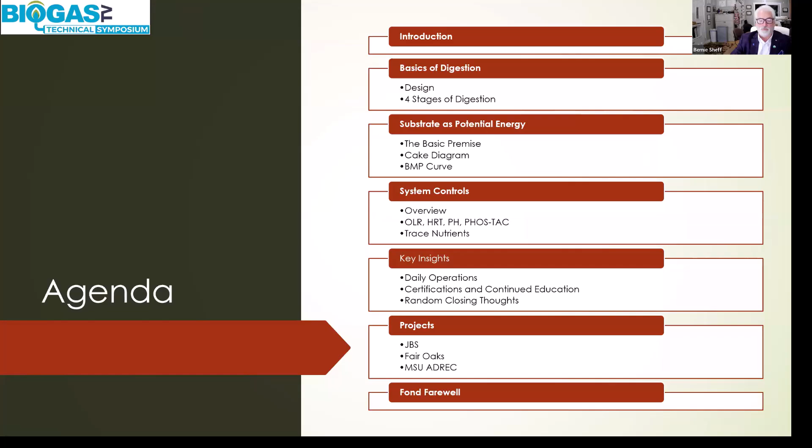Then we're going to talk a little bit about system controls, and then some insights. And then Paulie wanted me to talk about a couple of good projects. We didn't work on these together, but some of the stuff I've done in the past is a bit of an overview. So we'll get to that towards the end.

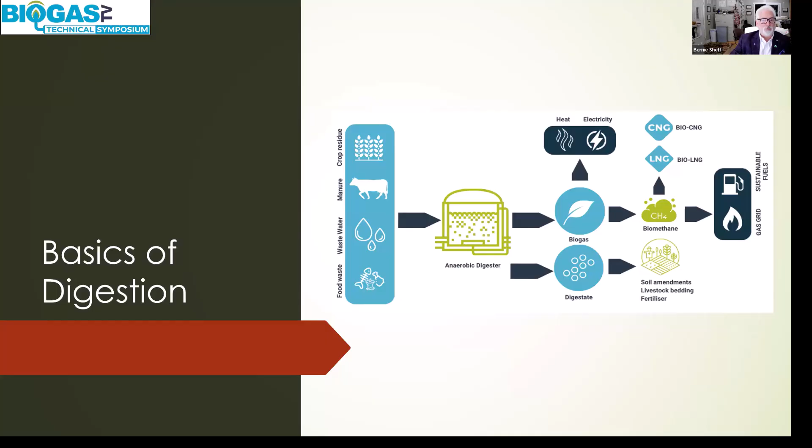So a couple neat little slides. This is a slide from the ABC. Again, these are more to have in your back pocket. I really like these two. It's a nice breakdown, and the digester doesn't have to be a CSTR. It can be a covered lagoon. It could be a plug flow. It can be a mixed plug flow. But in general, a nice slide there for you to have.

This is a second one. I think this is just a neat little slide that you can have in your back pocket that talks about anaerobic digestion in a complete overview, which is something you might need when that tour comes by your facility and you'd like to put something up on the wall to give them a little primer.

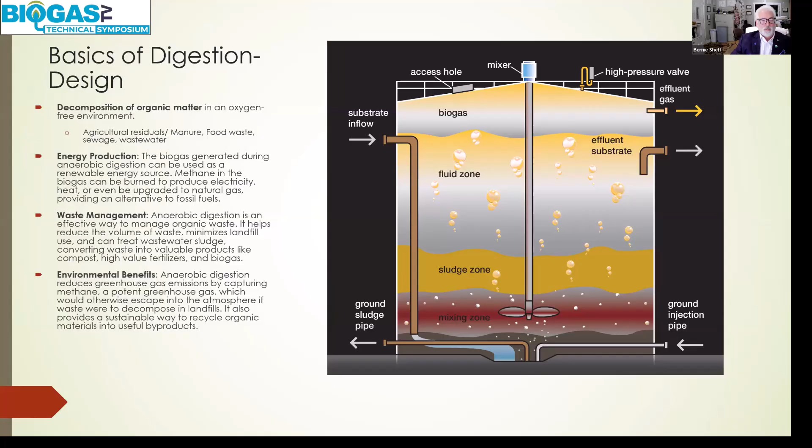So when we're talking about anaerobic digestion, and most of you might know this by now, it is indeed a 4-stage process. This slide we put together has some nice words, and it'll marry up nicely with the next slide. First, hydrolysis: it's where your complex organic molecules, your fats, your proteins, your carbs, are broken down into smaller molecules. These are your sugars, your amino acids, your fatty acids, things like that.

Then acidogenesis happens, which is a bacterial process where the products that came from hydrolysis are converted into acids. The next step is where we take those acids, and again, this is all bacteria doing the work, and these acids are further broken down to produce acetic acid, hydrogen, and carbon dioxide.

And then our fourth step. What kind of a crazy person would put the energy at the very last step? Essentially, you've got steps up front that are uncontrollable, and you've got one step at the end, methanogenesis, which I always like to call the old man of the bunch. That's grandpa. He's in the home, and he has to get the exact amount of food every day, and he's not a bacteria. He's actually a different organism, the oldest organism. Archaea means the ancient one.

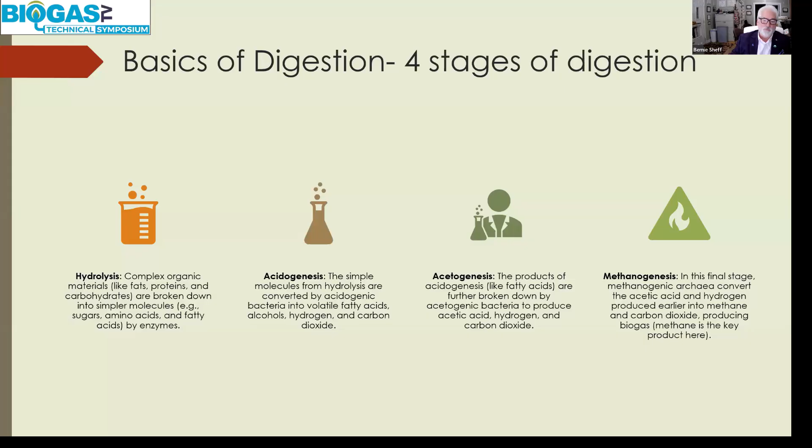So when we look at this in a different way, this is a slide from the American Biogas Council that I've been using for years. Take the words from the previous slide, and that should help you explain what's going on here. Check out that very end step, going from 3 to 4A and 4B. You see something interesting going on? Right, up to 25%, and maybe more. It depends if you can feed more hydrogen into the system.

Think about that. You feed more hydrogen into the system, and there's this other pathway that's there doing its job. So you have acetic acid, or hydrogen and CO2, both being converted by a couple of different forms of archaea. Methanosarcina is the one using the hydrogen. I did some tours; if you ever get a chance, go to Denmark and see what they're doing. I went to one facility.

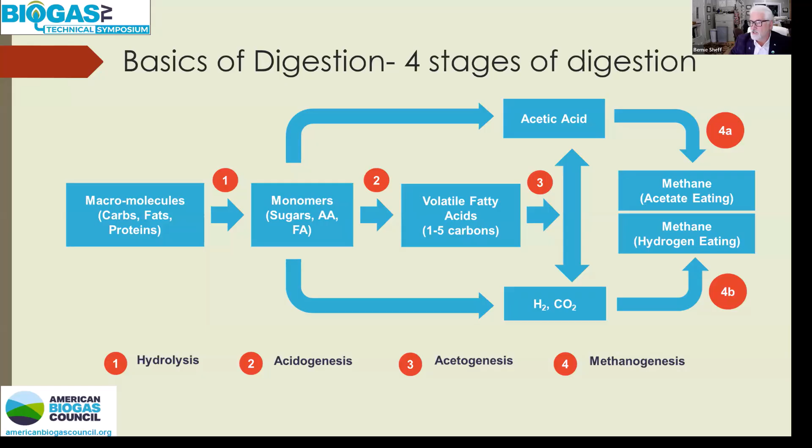When they had excess electricity on the grid, they would use the windmills to turn hydrogen generators and feed the hydrogen into the digester. Somebody's figured out something, hey? Somebody's a step ahead of us. That means we just got more to learn.

Okay, I want to talk about substrate now as potential energy. We understand, just amazingly by what you've already gotten through, you know how anaerobic digestion works. I want to really get into this because as an operator, turning a wrench or pulling out a pump or keeping the upgrader running, that's important. That's mechanical. But understanding what's going on in that tank is going to make the difference between you running a successful facility or you having problems, right?

So I want you to start out, and this is the basic premise. You must understand that everything can be considered volatile solid or volatile if it will burn. If it burns, if it makes heat, it is, by definition, volatile. Unfortunately, the types of VS are completely different when considering their viability and their ability for the digester to make methane from them.

This paper, go get it. Right after I'm done, I want you to get online and get this paper and read it. Doesn't matter if you run a food waste digester, whatever you're doing, read this paper. One of the best ever written. She's tremendous. Dr. Ann Wilkie, just fantastic. You read that paper, you go back to what we're saying right here, you must understand this.

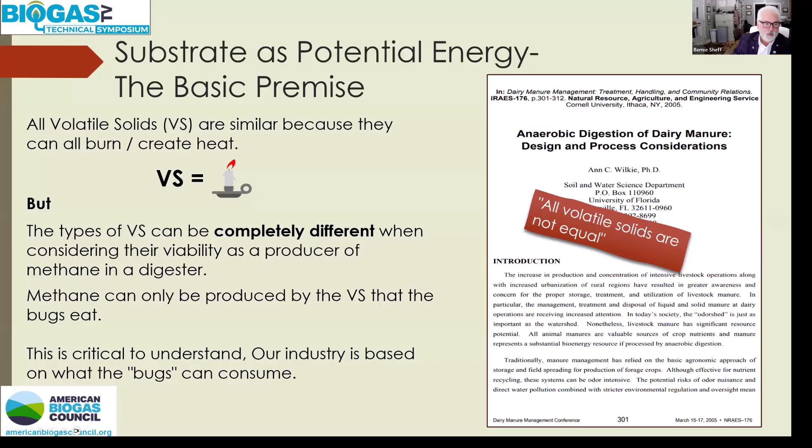Our entire industry is run by a bunch of bugs. That's it. The bugs run it, right? That's where our energy comes from, is bugs, bacteria and organisms that work together in a 4-step process in order to make methane.

So from that standpoint, going forward in your operations or anytime you're designing a digester, if you're an engineer or operator or process control, I want you to look at any substrate you're going to be dealing with as a 2-layer cake. You got a layer of cake, you got a layer of fruit, and then the second layer, but it's not cake on the bottom. The bottom is going to be wax-coated cardboard. Bugs can't eat it, but it certainly burns. It floats, doesn't separate, it comes out of the system. Look at the BMP, 0, right?

Conversely, look at the sugar. What happens when you put that piece of cake in the reception pit going into the digester? Cardboard comes out. The sugar immediately jumps all the way to the second step. It completely dissolves and starts making gas quickly. The cake might spend some time before it finally breaks down, but your fruit might be there for a day until it's completely broken down and gets into the system.

When you get a BMP for something, you always need to be breaking it down in your head. It's a high sugar substrate or it's manure. Well, if it's manure, I know that 45 to 50% of it is going to be fiber, maybe more, that doesn't make any energy. So that's why understanding this is so important.

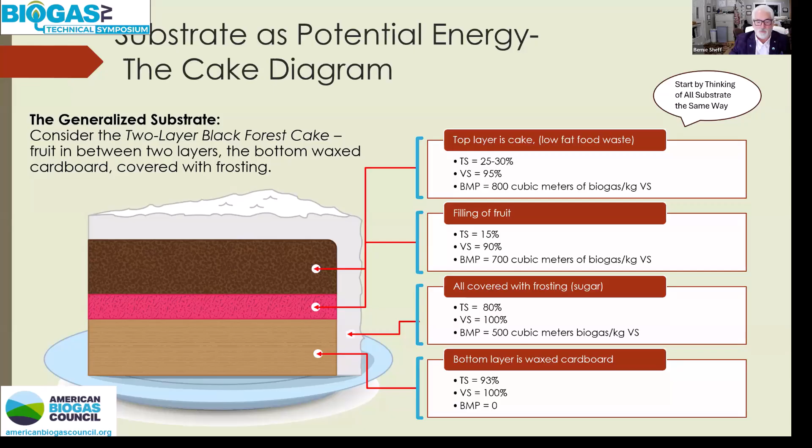Always think about what in the substrate that's coming to your facility makes gas and what can't make gas. And the ultimate arbitrator is the bug. Bernie's bugs. That's what's going to make the decision on what makes gas. So that's why we run biomethane potential.

Now, Paulie asked me to add a couple things in here, the difference between BOD and COD. So you know that BOD, biological oxygen demand, is what you determine usually from wastewater, but you can do it with pretty much anything if you can get it dilute enough into your BOD bottle, and you have bacteria in there that break down the biomass. The amount of oxygen they need to break this material down aerobically, that's BOD.

COD is a lot like taking that candle that I showed you and burning everything. There's no aerobic bacteria that can eat the cardboard and eat the wax cardboard. They're not going to do that, right? They're going to eat the sugar off the sides. COD, however, if you put that in a COD, the COD will completely destroy that. It uses a very strong acid like chromic, and it completely destroys that sample. And then you determine how much oxygen was necessary to do that.

Does that tell you how much biogas it makes? No, right? Doesn't tell you that, because the biogas is based on what the bugs do. So when you're thinking about BOD and COD, I would strongly urge you to think about it the same way as the difference between VS and a BMP. A BMP is based on what the bugs can eat. BOD is what the bugs can eat. BMP, biomethane potential, is what the bugs can eat. COD and VS are complete destruction, and you need to know a lot more about the sample before you can determine how much gas it's going to make.

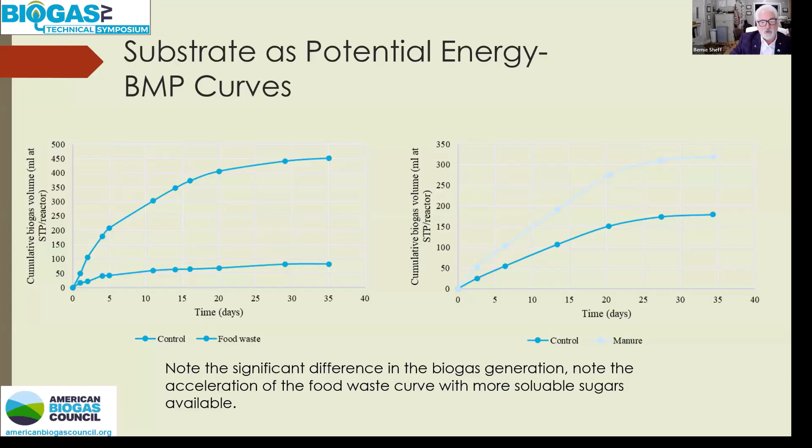So, a couple curves. Take a look at that. Notice the difference here, that the bugs are doing the work, right? See the curve for the food waste on the left side of the screen. You see it's very fast. It comes up. That's because there's sugar in that food waste. Take a look at that manure on the other side. See the flatness of that curve? That's something where the bugs are having to work hard. They're going to have to work their hearts out in there in order to get that all broken down so that they can finally plateau out and get all their energy.

I want to use these two curves to make sure you understand something. When you send a sample out and get the results back, don't just take them and run. Now, you see these two curves right here? You saw that the standard curve I showed you before for manure should be a long slope. And then you get this curve back, and this is manure also. Your end number, say 350 liters per kilogram of VS added, is not so bad. But take a look. It actually came up, and in around 7 days, it went flat. That should tell you something's wrong.

Either something's wrong with your sample, something's wrong with the seed, or something didn't happen, because manure shouldn't climb that fast and then go flat. These are both manures that came back from a lab. We had to go back and found out, yeah, something got screwed up, and got it fixed.

And this other one on the right is manure also. Take a look at that. See how fast that came up, and it got up near 1,000 liters per kilogram TS. It got up to 1,000, right? If you get something up that high, that's grease. You're talking rapeseed oil, canola. That's what gets that high. Manure is not going to get there.

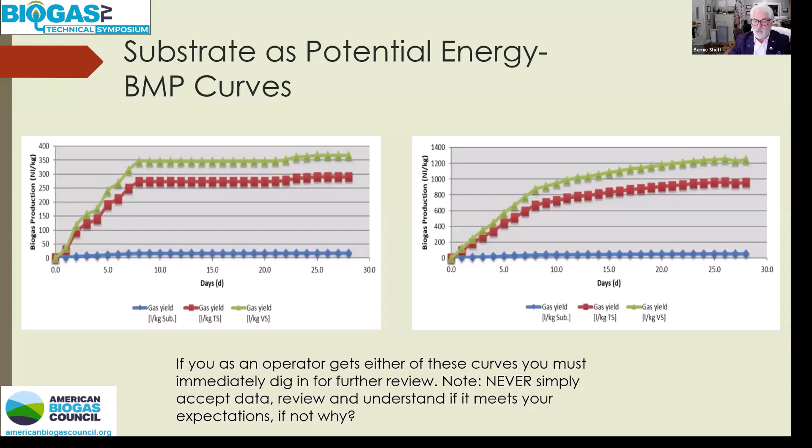So when you get a sample back and get the results, do not throw your hands in the air and run out saying, "Well, I got my results." Stop and think through it, and make sure that something didn't happen with the sample at the lab, or you're going to get bad data and go forward on design or operations with it. You're going to either estimate too much gas, or you're going to take up too much space in your digester with something that's not going to make energy.

So let's talk a little bit about systems control.

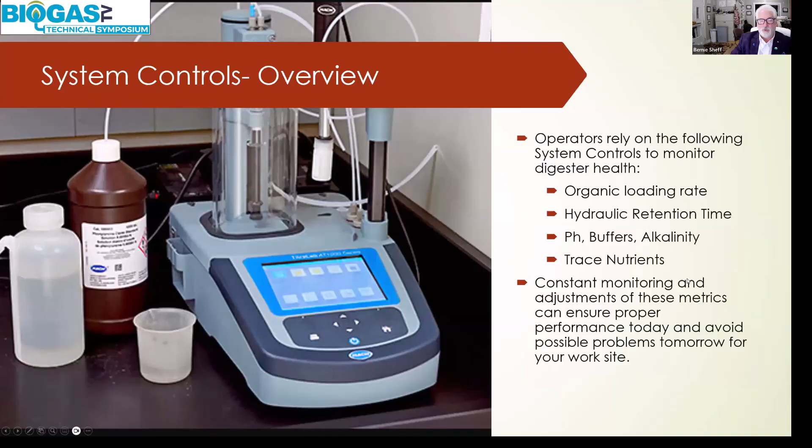We rely basically on a few numbers. Organic loading rate. This is actually a FOSTAC that you see the picture of here. It's a FOSTAC system, Hach, I think. But we run on organic loading rate, hydraulic retention time, pH, buffers and alkalinity. And I'm going to talk a little bit at the end about trace nutrients. And so let's jump in right away.

On organic loading rate, what we're looking at is how much energy can be put into that digester for the unit of volume in a day. Okay, and your organic loading rate, you should know that. Every digester operator should know it. Some folks will say, well, I'm running a dairy manure digester, and I get the same thing every day, and as long as your loading rate comes in, you should be fine.

What you have to be concerned with there is if you start to get like this time of year where you're getting the thaw, water's coming in, right? You're actually getting more water, so your organic loading rate is going to start dropping, right? Because the amount of VS versus the amount of space you're taking up with the water will start to go sideways on you. So again, organic loading rate, simple calculation.

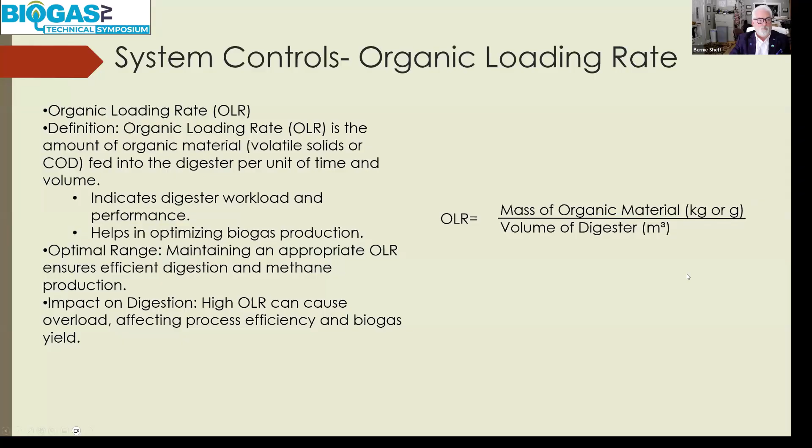We take you through this all in operator school, but generally an organic loading rate, we can get up as high, I've run some stuff as high as up in the 4.5s and 5s when I've got like a consistent feed of some sugars or something like that. And getting down into food waste, you're going to be down 3, 3.5, 2.9, someplace in there for your organic loading rate.

Hydraulic retention time. Simple calculation again. What we're looking at here is how much time you're going to allow your bacteria and organisms to do their work, right? And this is also then based on how you design all of your downstream systems, because they have to be based on the flows that you're going to get out, and how your storage is being taken up. So simple calculation: you take your volume of your digester or your system, divide it by your flow rate, and that gives you your detention time.

Anytime you get confused with this, always think about this. If it's 1 million gallons a day and you're putting into a 1 million gallon tank, it's 1. If it's a 1 million gallon tank and 500,000 gallons a day of flow, detention time of 2, right? So don't worry about memorizing the equation. All your engineers on here, I'm sure, are just shaking their heads. But for folks that don't do this every day, simple way to remember it. If it's 1 million gallons in a 1 million gallon tank, it's a detention time of 1.

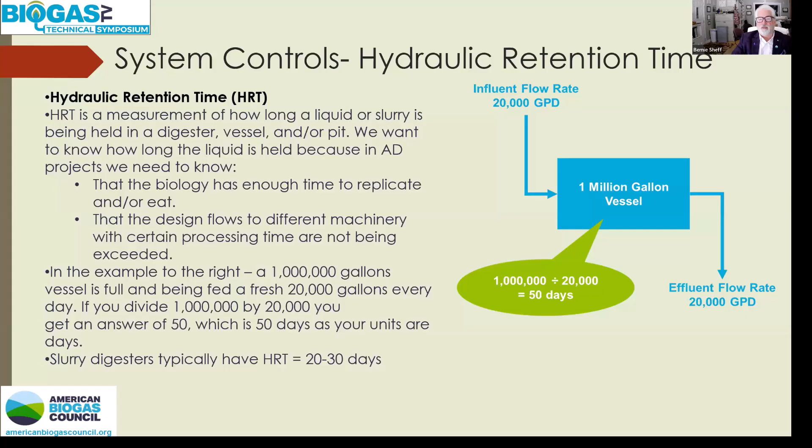So I put this little note on here about slurry digesters, hydraulic retention times 20 to 30 days. Depending, if you're running a silage digester, you might run more. Municipal digesters doing sludge, they might do much longer than that. Even a project down there at Fair Oaks on the sand separators was running a lot less than that, down in the 12 to 15 day range. But again, everything was forced over into a soluble side, and so the system was being forced quickly.

We talk about system controls, pH, buffer, and alkalinity. Dr. Craig Frear put this together, and it's still one of the best slides I've ever seen for this. Generally biological organisms like to live around 7; 6 to 9 is normally where they can be. We have a buffering system, however, and that buffering system is what allows us to take in things that might be a pH of 4, like orange juice.

So when you start to think about buffering systems, your blood has it, your body has a buffering system. If you overcome that buffering system, you die, right? So that's why you had fraternities having kids drink so much orange juice at a time. Their body reached a point where the buffering system was destroyed and they were gone. It doesn't take long.

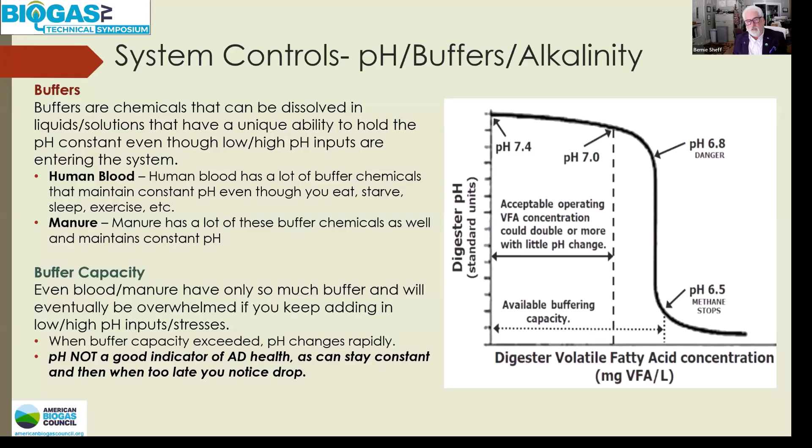So again, the first thing this should tell you is that running a digester based on pH is probably the last thing in the world you want to do. Okay, so when we look at buffering systems, right? Again, I talked about it. Manure has one. Manure actually has three buffering systems in there. You've got calcium, you've got ammonia, that are all part of the buffering systems in manure. But most importantly to understand here, if you're monitoring pH, it's too late.

So this is the reason: volatile acid alkalinity. This is why you monitor that, and you're going to check pH on a daily basis, because that tells you some other things, and as an operator you need to know that. But your most important thing is volatile acid alkalinity. Again, on dairy farms, not as important. When I ran food waste digesters at Michigan State, or out east, we were running volatile acid alkalinity on a daily basis, plotting it and watching it consistently for any perturbations which might indicate a problem coming.

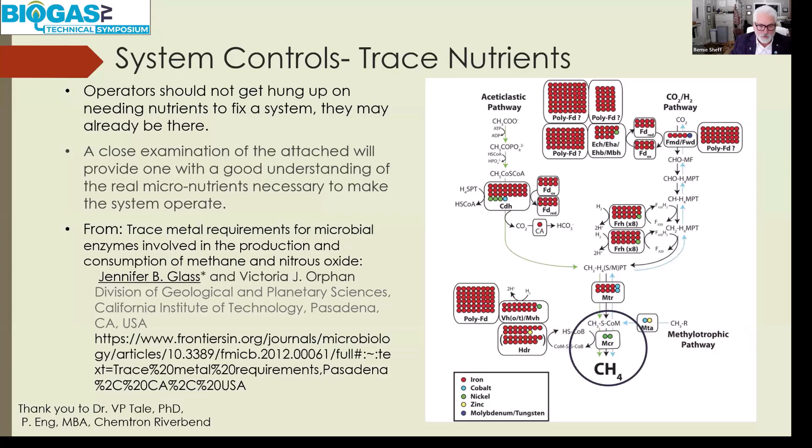So let's go back now. Paul, I got one minute, or do I have a few more? You're going to give me a little more leeway. Yeah, we're good, man. You want to preach? Thank you, my friend. These people are volunteering to hang out with us, right? If they want to bail, they can bail. We're not forcibly holding anybody here. We're just luring you in with your charm and your intellect. Well, thank you, my friend, you're way too kind. I made all this up out in the parking lot before I got in the office today.

But when I think about key insights for daily operations, some of the worst horror stories I ever lived through weren't on a dairy farm, but in food waste digestion, where what people brought us was unknown, or it was a new provider, or a new driver. I'll never forget, down in North Carolina, the driver shows up and we started sampling. We always took a sample off the back of the tanker. It was supposed to be DAF float from a chicken processing facility. Run it, pH is at 4. We're like, that's a little too acidic, let it run another minute, then pull another sample. Second sample pH was 2.

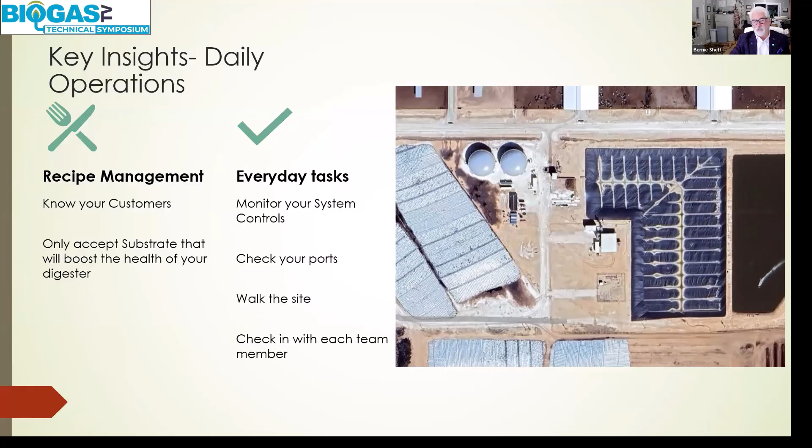As far as the most important things you can do on a digester, I believe it's not only monitoring your system controls and checking your ports, it's walking the site and talking to every one of your team members every day. You say, well geez Bernie, we all knew that. Well you'd be surprised at the number of people that try to run a digester from a remote location and don't take the time to talk to every person on that site every day.

I wanted to add a little bit about certification and continuing education.

We are pushing really hard, and I wish I could have all of you come with me onto the Hill when I go back out there in another week, up and down the halls of Congress, because when you're telling people about getting operators certified and creating careers, it's just a huge boost, right? The benefits of certification and career education.

Increase productivity, decrease your turnover. We have the operator school, we have continuing education courses. We also now require that you get OSHA certifications, lockout-tagout, confined space, and a Red Cross certification for CPR.

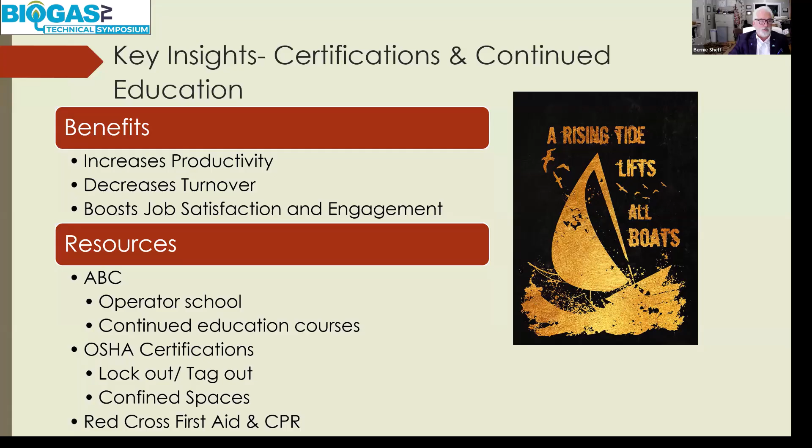I say all this because, if you've ever heard me speak, 9 times out of 10 I'm going to add this in: the rising tide is what lifts all boats. I believe strongly that educating and teaching our operators, those operators are the folks that are going to make sure this facility runs or not. So getting them educated, keeping them educated, and making a career for them should be the most important thing the owner or engineer can do to make that facility prosper.

So a couple random closing thoughts. I found this cartoon and just loved it. Again, as I said before, nothing can replace that hands-on approach with a good maintenance management system.

New employee indoctrination: never, ever, ever stick a new employee out on the site and figure they're going to learn it. Take them immediately and do a walk-down with your up-to-date P&ID of the entire facility. I strongly urge that operators must be part of your process hazard analysis, and use that process hazard analysis to do all of your N+1s, for when you want duplicate systems on the site.

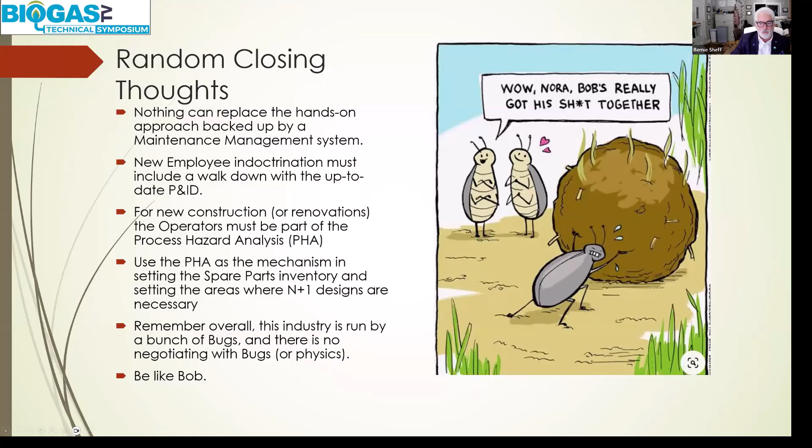More than anything else, remember this: this industry is run by a bunch of bugs, Bernie's bugs, and there's no negotiating with bugs or with physics. In the end, you should always be like Bob here, our guy pushing it around. So very quickly, I want to show you a couple projects that I worked on.

This was my first digester, all the way back to 1991. She's still running today. My son, who put most of these slides together, James Sheff, was born the day we started filling this, all the way back to '91. So you see the wastewater treatment facility there.

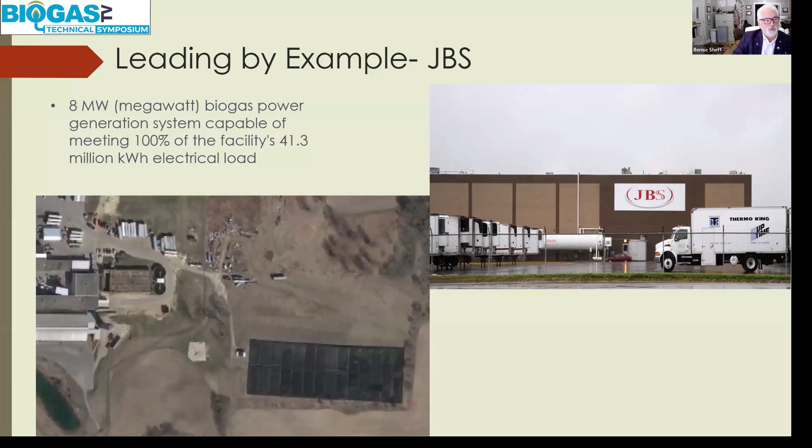We come out of the slaughterhouse, we go into the covered lagoon. This thing runs 24/7, 365, and we run an 8 megawatt peaking facility, and that facility to this day is churning along doing its work. We had a mixing system, and all the way back in 1991 we put a mixing system in it to make sure our sludge wouldn't settle in the bottom.

This is a really cool project that I was so honored to work on with Mark Storman. One of the great honors of my life was working with that gentleman and building this project over in Indiana.

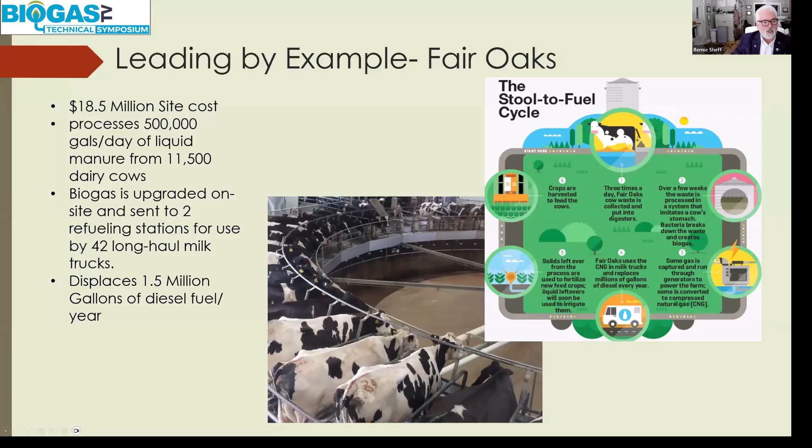The first few years, Mark would call me and say, 'Bernie, we've been up for 2 years, we've knocked 3 million gallons off.' It's 3 years, it's 4.5 million gallons. Now we just say it's 1.5 million gallons a year of diesel fuel knocked off that I-65 corridor by this facility.

Another project I was really honored to work with, back when I was with Energia, was this facility that's turned along. It's over at MSU. Again, it being my alma mater doesn't mean I'm about to well up in tears, but I'm real proud of this facility.

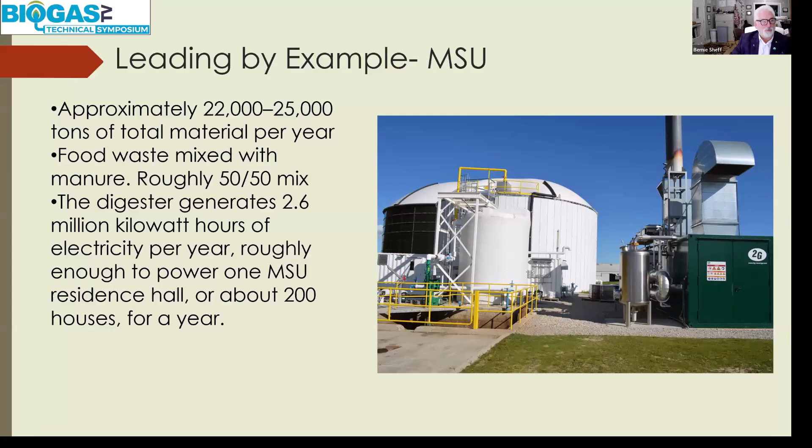It takes food waste in. You can see we take both manure from the dairy and from the hog operations, and the horse barns all come over here, plus food waste from the Meijer stores and all the university kitchens.

So in the end, as I said, I want to thank ABC, Dr. Craig Frear from Regenis, VP Tale, a dear friend, and Wei Liao from ADREC, and of course Burns & McDonnell, and my son James Sheff, who put all these together.

So with that said, I see there's a couple questions. I think we're doing okay. The next question was, is the MSU facility still running? And the answer is, it is right now.

They took down the top two. We had some perforation after 10 years in the top band, so the top bands of the top two panels all the way around have been replaced, and the system, I think, is back up and running. If not, it's going to be back up shortly. I drove past it last Saturday, and the top is back up and on and inflated. I didn't see any gas coming out of the top of the engine, but that's the reason it was down, was to replace those two top rings.

We feed the top with oxygen, and that does cause some acid formation up in there, so we had some perforation starting to form up in the top band of the tank. So again, we replaced those, put it back on, and it's going to be part of the whole new digestion system that's starting up with the new dairy farm. There's a whole new dairy expansion going on, and the digester will be part and parcel of that.